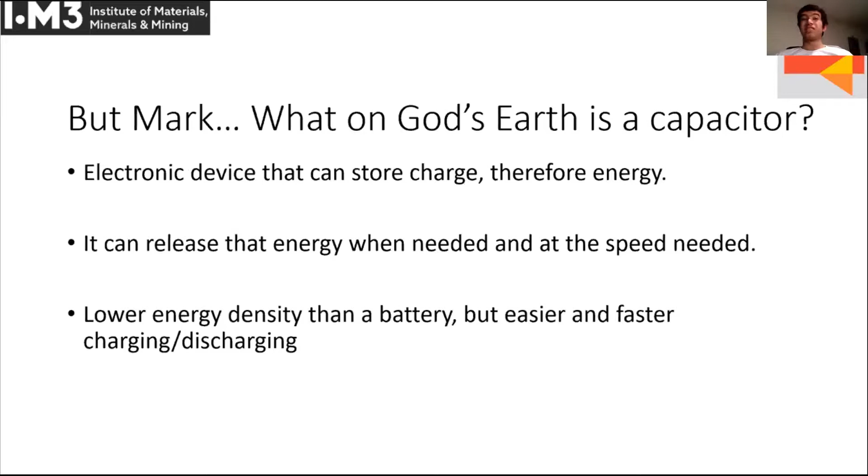What is a capacitor? So in its simplest form, it's an electronic device that can store energy in the form of charge. And it can then go on to release that energy when you need it and at the speed you need it, quite rapidly as well. It's much faster than a battery, but it can carry less energy than a similar sized battery can. So if you're into cars, you can think of capacitors as having higher acceleration and batteries as having a higher top speed, essentially.

So how does it work? Well, 2 metal plates are electrically connected and they're separated by air. So there's a power source that kind of pushes electrons from one of the plates to the other. And that means there's a pileup of electrons on one plate, which means there's a negative plate, and that leaves positive charges on the other plate. And the electrons would ideally like to combine with the positive plate, but because there's air in between, which we know is an insulator, they can't really make that jump. And so an electrical field is created in between them.

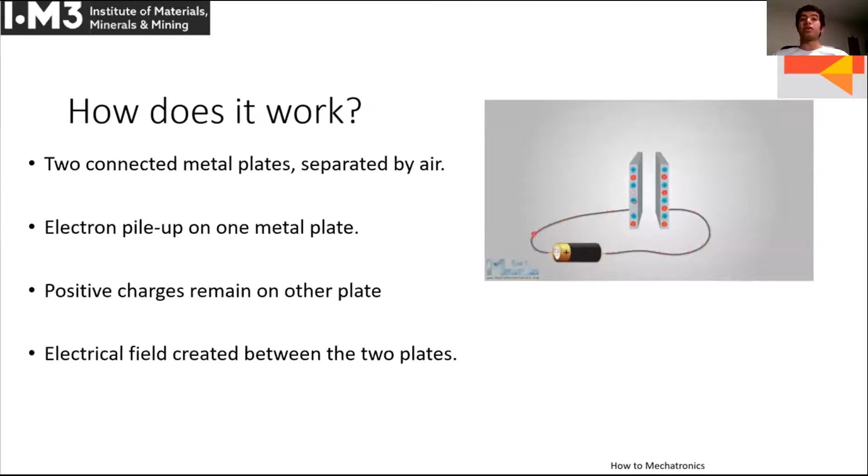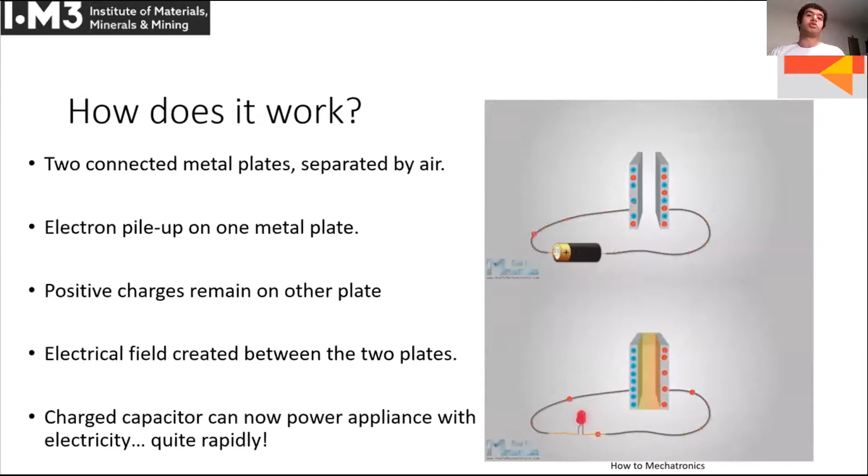And if we then remove the battery and put an appliance in, we've now just given the electrons a way to recombine with those positive charges. And in doing so, they pass by the appliance and operate it, essentially, which is useful for us. So capacitors are used in a lot of everyday things.

So this is just an epilepsy warning here. So if you're susceptible, I'll give you 3 seconds to just turn away, and I'll let you know when you can turn back. So 3, 2, 1. There's a flash camera snapping. So the time it takes between you hitting the button and the light to come out is the capacitor charging up. And then that fast release of light is essentially the capacitor, the electrons just coming back.

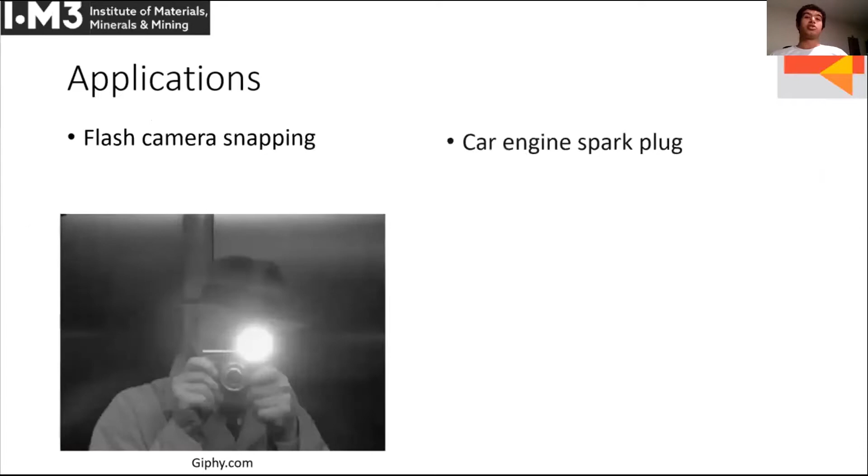But we don't live in a perfect world, so a high concentration of electrons, they're attracted to the positive plate. They would really like to go to that positive plate because we know positive and negative charges attract. And besides the attraction to the other plate, they also start to repel themselves on the negative plate. So essentially it's the attraction to the other plate as well as the negative repulsion in their own plate that leads to what we call breakdown.

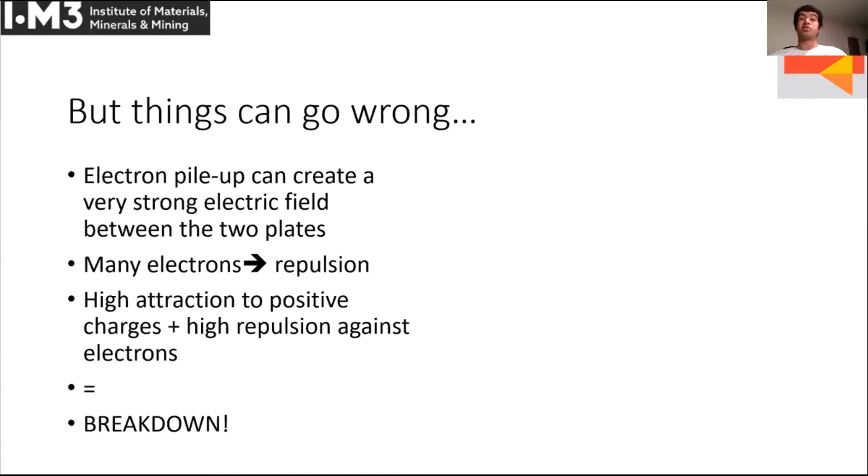So at some point you'd find that once the electrons get too close to each other, they really want to stay away from each other. They break down the air, so they will conduct through the air. It's called a breakdown field, and it's strong enough to turn the air from an insulator into a conductor. And that's what happens with lightning.

So there's an accumulation of electrical charges in the clouds, and it's so negative that they really want to get away from each other. And so the Earth is treated as a positive, and then the electrons just have to go somewhere, so it just strikes through the air. Fun fact about lightning, it superheats the air around it to 30,000 degrees Celsius.

So that's around 5 times the surface temperature of the sun. So there's a lot of energy in these electrons. So that's why they'd really like to get away from each other.

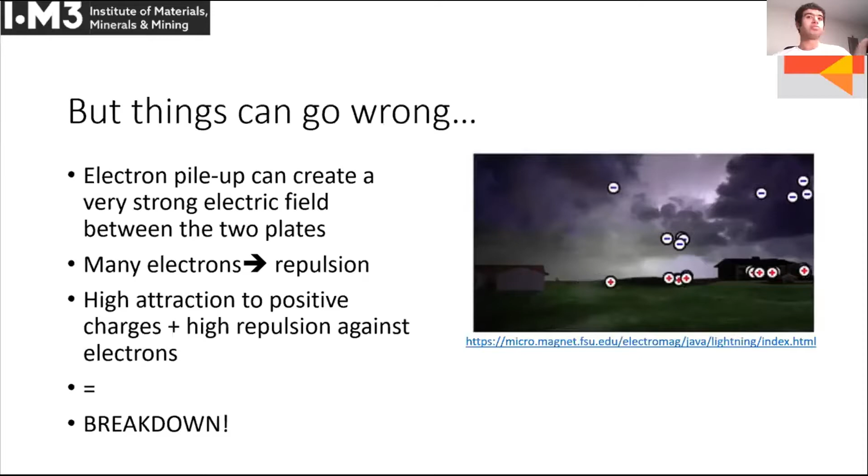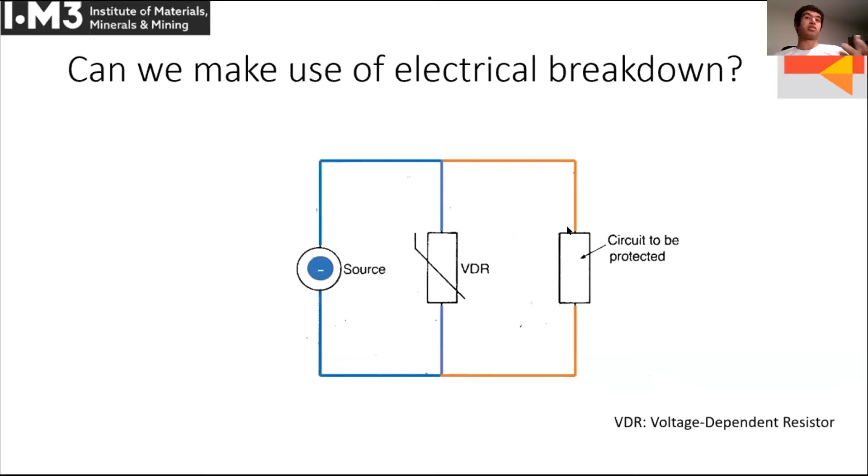This breaks down at high voltage. So essentially the electrons have a path of less resistance to go through. And by doing so, the high voltage is eliminated from passing through your appliance, essentially. So it's useful here, but it's not really useful for capacitors in this application. So still quite a big problem we need to solve.

So scientists have found through history: get something that can insulate better than air can. And that's pretty logical. If air can't hold that amount of electrical charge, get something that can. And a polar material also enhances the response to the field. So polar just means there's a positive end and a negative end of the material. So that's our challenge, finding an electrically insulating material that has a more positive end and a more negative end.

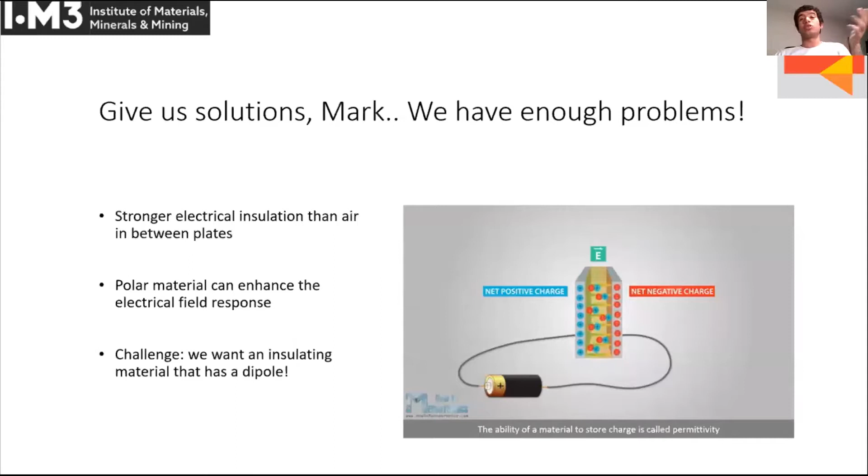And in order to quantify how good materials are and compare them to each other, there's a permittivity term that scientists often use. So the higher permittivity of a material, the more charge it can store in these kind of capacitor applications. So let's talk about the ceramic that they've come up with. So the most common one is barium titanate. We do quite a lot of this in our undergraduate program. So dielectric just means it's the insulating material that's used.

Barium titanate adopts what we call the perovskite crystal structure, which is shown on the right here. Each of the spheres represents an atom. So this is very small. A unit cell, which is what we call this, you stack a lot of these next to each other, and these make up your bulk material, essentially. So in barium titanate, barium occupies your corner atoms, titanium occupies the middle of the cube in the center, and the oxygen occupies the 6 center faces of the cube.

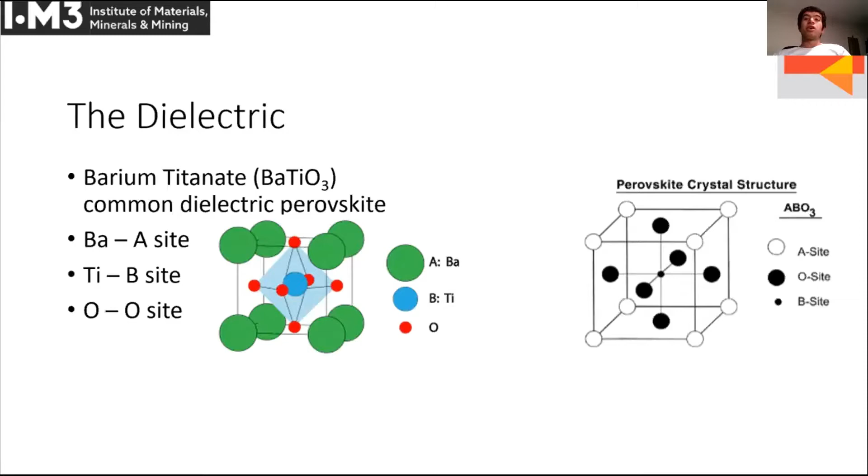Now that you know about the ceramic, let's talk about the capacitor itself. So scientists, again, have found out throughout the story of their development that instead of just having 2 plates, why not just stack a lot of plates next to each other? And that's what we can see here.

So the thinner, whiter lines are essentially the electrodes or the plates, usually made out of nickel, but can be made out of other stuff as well. And they're alternating at their termination, and that's how they get their positive and negative charges. And the darker, thicker sections are the ceramic in between.

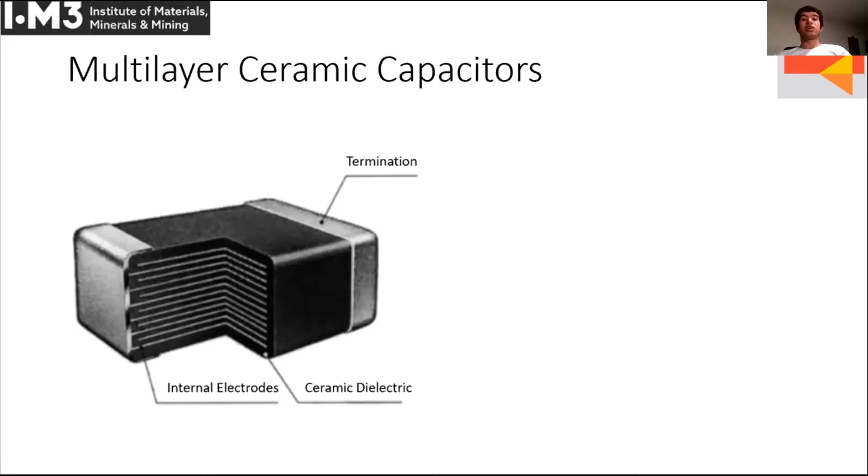So there's an extremely high demand for capacitors, and the industry's growth is exceptional. Just for scale, 2 trillion capacitors in 2015, and in 2020, we expected 3 trillion capacitors to be sold. And indeed, despite the pandemic, because we don't really stop using electronic devices, 3 trillion capacitors were sold. So that's 150% growth. Just to put it in scale, 3 trillion is 3 with 12 zeros behind it, just to give you an idea of the magnitude.

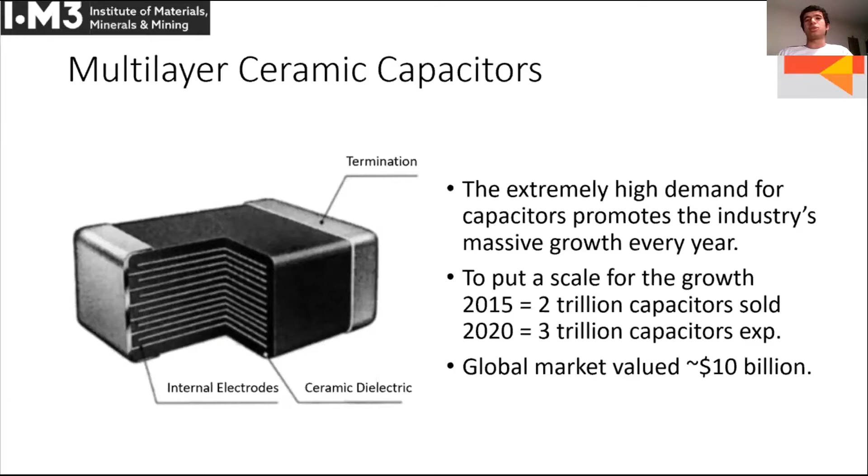Global market is valued at above 10 billion. So very, very big. There's thousands of these in your phone, thousands in your laptop. What you're using to watch this presentation probably has over 1,000 as well.

So in the previous slide, I showed you barium titanate was cubic. That's only true above 125. So there's more problems. I keep solving problems, but we face some more. Under 125, it's tetragonal, which just means that one of the axes is longer than the other 2. In this case, it's the vertical.

So because the axis is elongated, the titanium atom in the middle can offset when it's put under a field, so it has a positive charge. And so once we start putting it between the positive and the negative plate, that titanium atom really wants to attract to the negative plate. And that's what I've got on the bottom left image here.

So imagine each of these is a unit cell, and as the titanium shifts up, you get a slightly positively charged side and a negative charge, and that aligns within the 2 plates as shown.

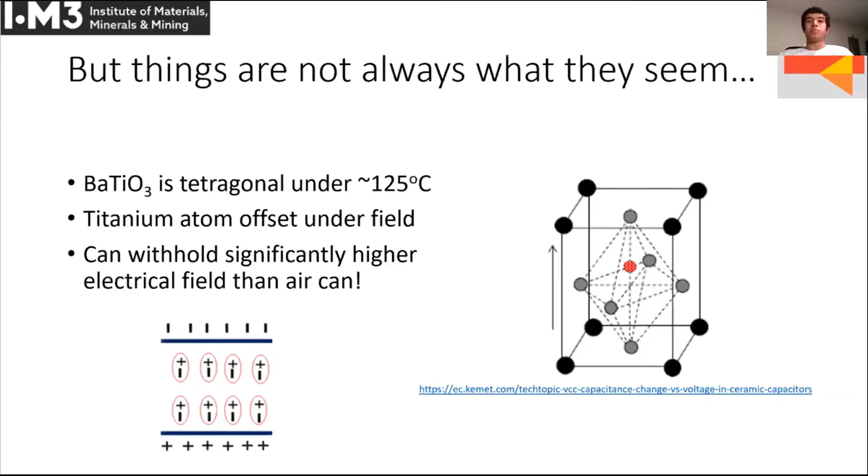Moving on, so I said it turns cubic at what we call the Curie temperature. So the titanium atom can no longer offset, it is just stuck in the center, and that way the permittivity, or the charge storing capability, takes a sharp hit, which is not ideal.

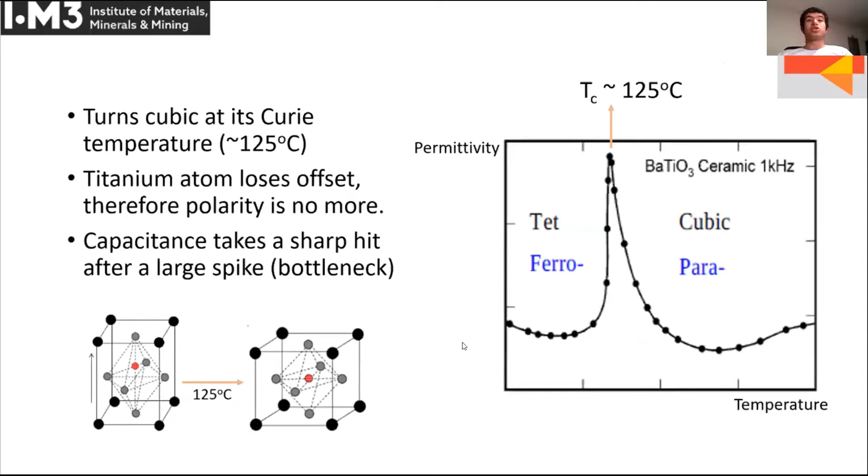So what we'd like to do then, I'll just present you with some small results of a research project I did as part of the SURE scheme at university. Essentially, we want to control that Curie temperature to be able to push it up or down, and then understand more about how capacitors can operate at higher temperature. We'd ideally like consistent behavior without the peak you've seen.

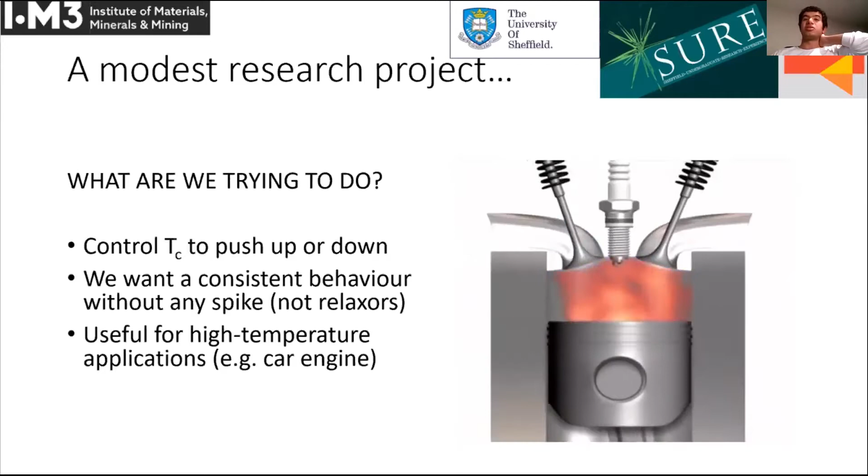And this is useful for understanding how capacitors can perform at high temperatures, potentially for high temperature applications, like the car engine. I should mention that the spark plug does not use ceramic capacitors, it uses other types of capacitors. But I just thought to keep consistent with regards to applications. But in terms of pure ceramic capacitor applications, any electronic device in any industry will have these in the thousands. So these are just some examples on the left here.

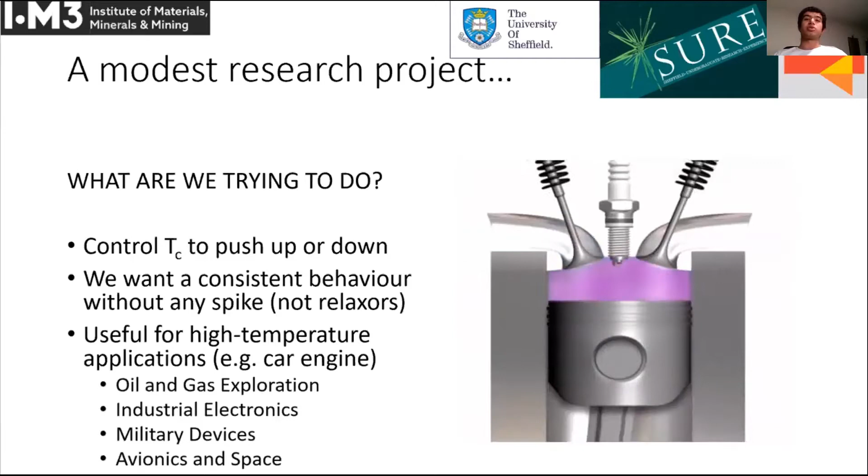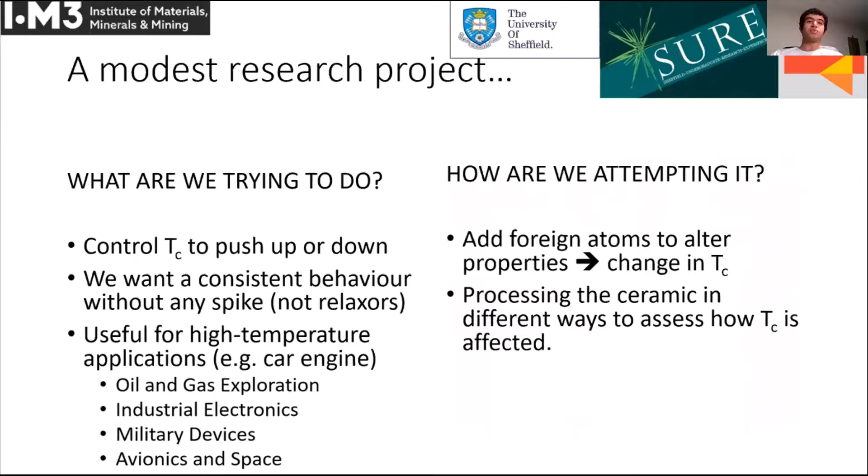So how are we trying to control that Curie temperature? Well, we're adding foreign atoms into that barium titanate ceramic to try and see whether we can get a change in that Curie temperature, to see if we can push it up or down. And making the ceramic in different routes or different ways can also help us assess if the Curie temperature is affected. So now that we have a good background with the topic, the foreign atom that we've chosen was calcium.

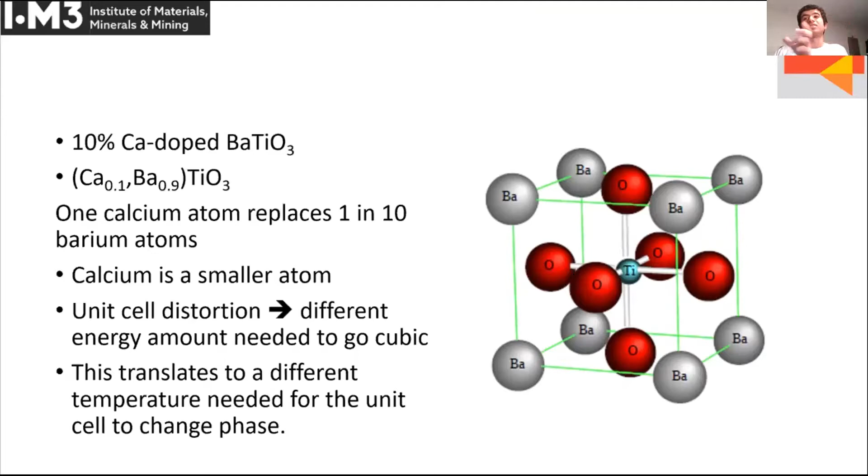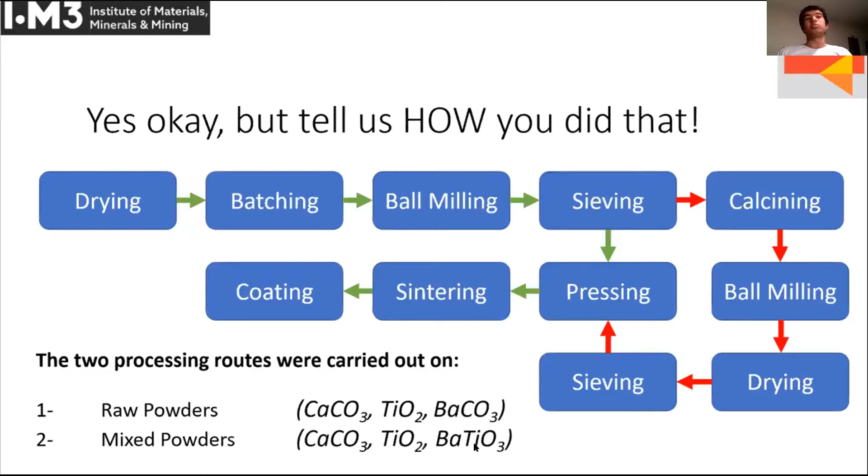So we undertook both those routes for two mixtures of powders: raw powders, which is how we obtain them in nature, calcium carbonate, titanium oxide, barium carbonate; and mixed powders, essentially just adding calcium and titanium to preformed barium titanate. So we did XRD experiments, and the scans essentially show that they're equivalent.

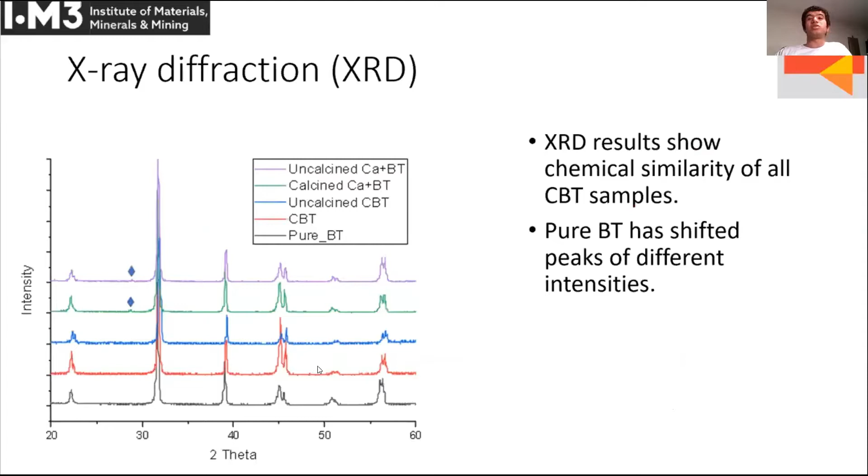Pure barium titanate, obviously you expect to have different peaks, so there's some shift if you can see it, and beyond 60 there's other shifts as well. But what I really want to show with this slide is that they're essentially equivalent, and we are in theory testing the same material. With XRD as well, you can characterize these distances of the unit cell.

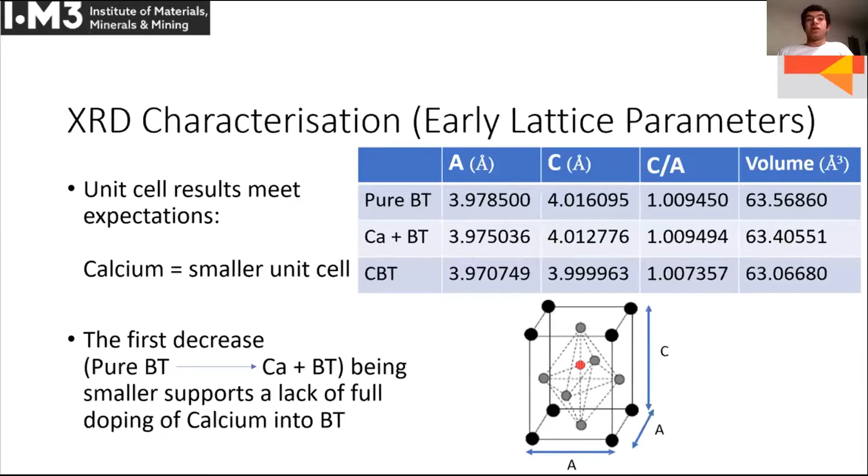So how we then measure the electrical response is we put the ceramic in an oven and heat that oven at a rate of 1 degree per minute. And then we set up alternating currents, which just go from one direction to the next. They keep kind of reversing direction. And these scan through the ceramic pellet 500 times at different speeds.

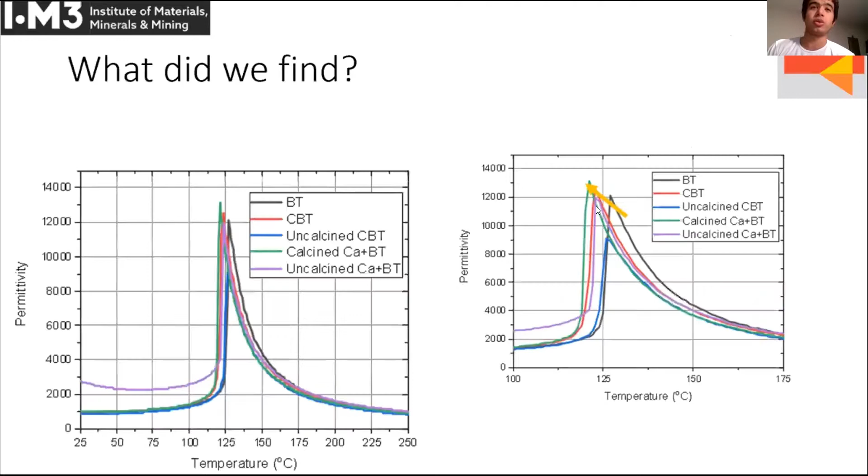And so in doing so, the cubic transition can be delayed or happen early, depending on what we want. So it's through introducing foreign atoms and making them in different ways that we can really utilize different transition temperature relationships. And we are, as a result, more able to use capacitors in different temperature ranges. Thank you so much.

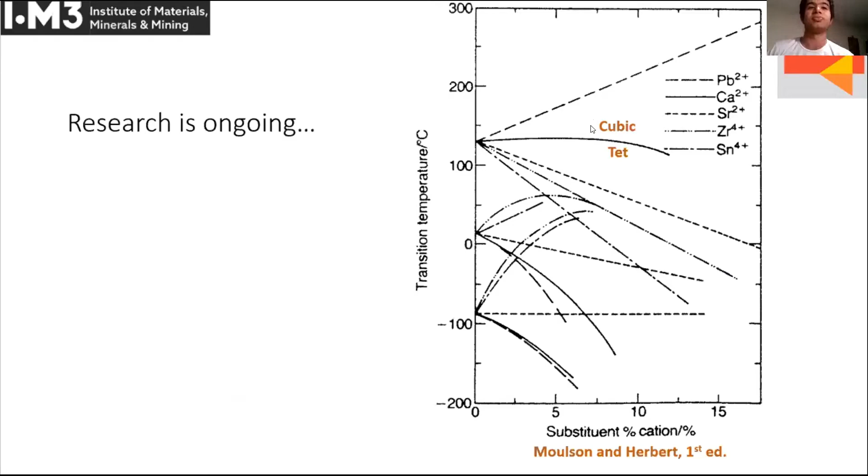Brilliant. Thank you very much, Mark. Very interesting presentation, and I'm sure the judges will have some questions for you. Okay, perhaps I will go to Peter first.

Okay, yeah, very interesting. Capacitors are things we don't often think about, do we? You know, we look at a spark plug and you don't think there's a capacitor there, and all these other things. So there's lots of them around. There's millions of them. So quite fascinating, the hidden component that we didn't know about.

A more general question, rather than going deep into the technical stuff: what about the availability of materials? There are so many capacitors required around the world. You're talking about barium titanate, wasn't it? Yeah, well, the calcium doped version. I presume that's pretty available, is it? Is the manufacturing of this pretty easy? And does that therefore make quite a cheap capacitor?

Right, thanks for your question, Peter. Well, actually, it's quite a developed process, you're right. Usually the main way of manufacturing these is called tape casting. In terms of the material supply, for barium titanate in itself, there's no shortage in the materials that I'm aware of. However, the industrial ones that we use do use rare earth elements.

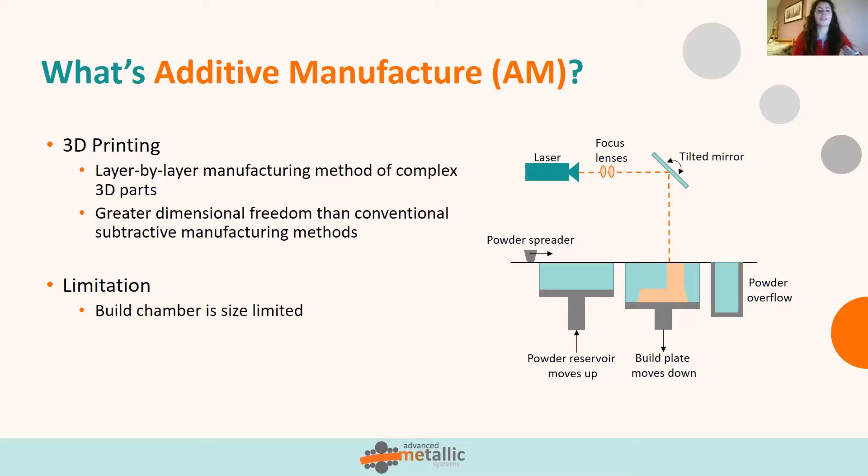So now I'll move on to introduce brazing. So brazing is a technique that's been around for thousands of years, and it involves the joining of two materials together using a filler metal at temperatures that are typically above 450 degrees C. So brazing has found a variety of applications, including fusion energy and microelectronics. And a particular advantage of brazing is that it can be used on dissimilar materials.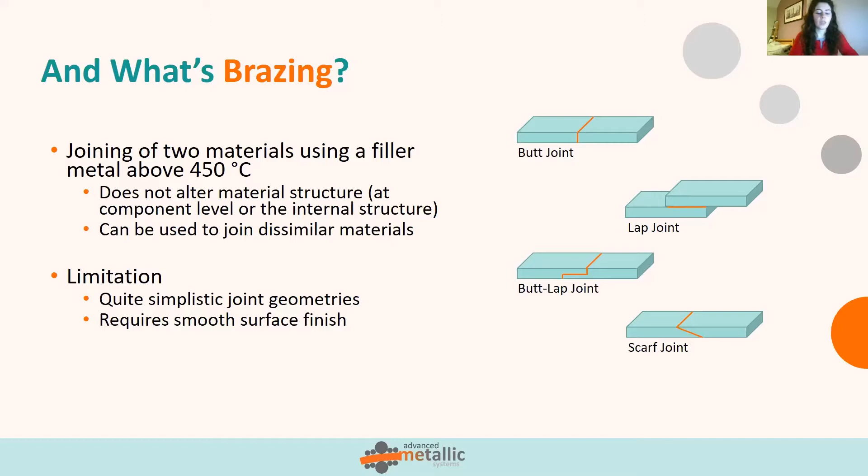So brazed joints are typically stronger and have better mechanical performance than soldered joints, and brazed joints also have an advantage over welding, because welding typically can cause thermal distortions within the microstructure. However, brazed joints can be limited in terms of the simplicity of the joints that you can produce, as you can see on the right-hand side of my slide. And also the surface finish for a brazed joint to be effective is really quite smooth, so you really need to machine it down.

In terms of the stages of brazing, it's a 6-stage process. First, you need to ensure that you've got a good joint design. You need to make sure that the base materials are cleaned for anything like oil or grease that might have been put on them during the manufacturing of the base materials. Then the oxides are removed with a flux. You then heat the base materials up to the required temperature for the brazing, and then typically introduce the filler metal, and this spreads through the joint via capillary action. And then the entire assembly is cooled and cleaned for any excess flux and such like.

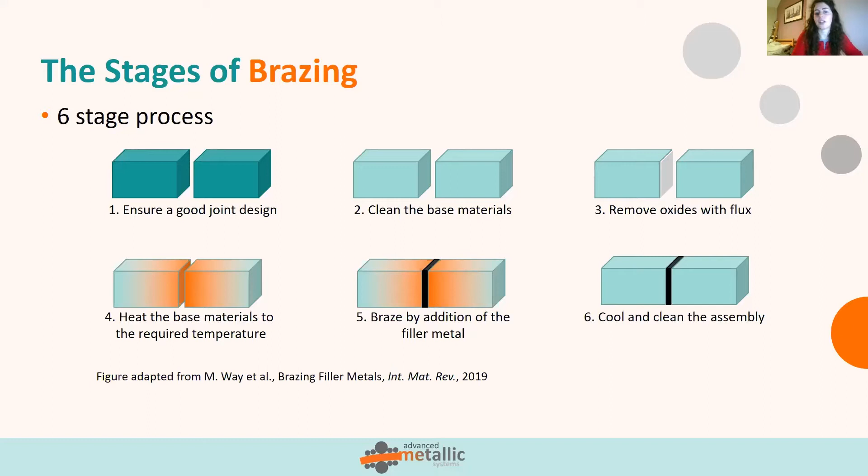So a really important part of this is choosing the correct filler metal system for whatever application that you're needing it for. So the first core property that I'm going to tell you about is the melting range. It begins at the solidus temperature, which is represented by T3 and T4 in the image. And that's when the alloy will begin to melt, and it goes all the way through to the liquidus temperature, which are represented by T1 and T2. And that's where the alloy will become fully liquid.

So this is really important for the specific application that you'll be needing a brazed alloy for, because you really don't want the filler to be melting in applications. And you can also see that T1 and T3 has a much wider melting range than the melting range between T4 and T2.

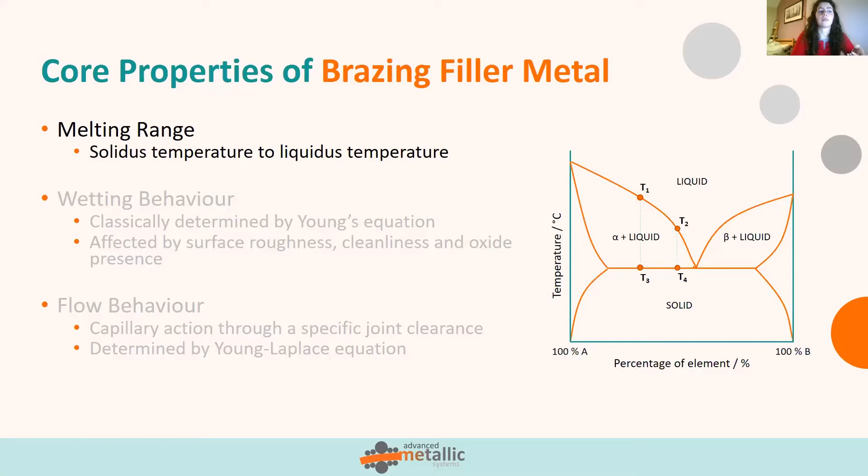The next of these core properties is the wetting behavior, and this is classically determined by Young's equation, where an angle less than 90 degrees is wetting, and this is what we want, and an angle greater than 90 degrees is non-wetting. So you need to have a positive interaction between the material and the filler metal to ensure wetting, and therefore to ensure that a joint is formed.

And you can have different types of wetting. So you can have reactive wetting or non-reactive wetting. And it's really important to consider what type of wetting you're going to be looking for, because reactive wetting itself can give an interaction zone which could cause undesirable effects, such as brittle intermetallics that would reduce the joint strength.

Other factors that affect the wetting behavior are also things like surface roughness, cleanliness, and oxide presence. And the last of the core properties is the flow behavior. Filler metals move through a joint through capillary action, so the flow behavior is really important, and this is influenced by the melting range. It also means that you can tailor a joint clearance based on the flow properties, or you can base which alloy you select on the clearance that you need. So a better flowing alloy would be better suited to a smaller clearance gap.

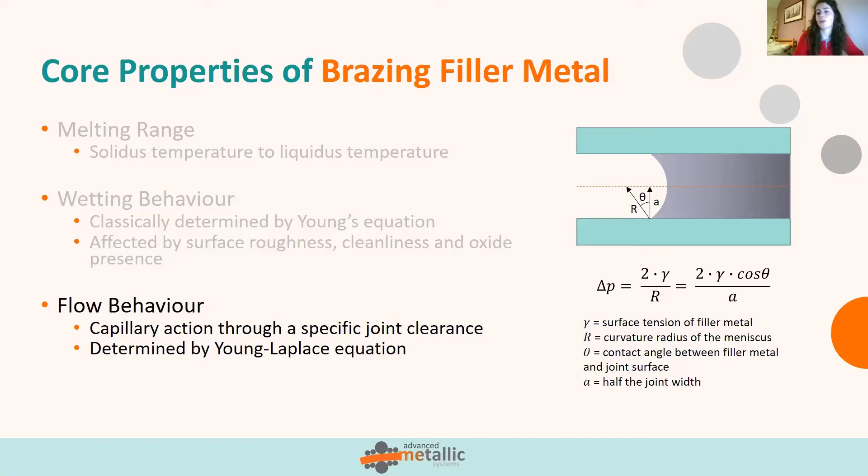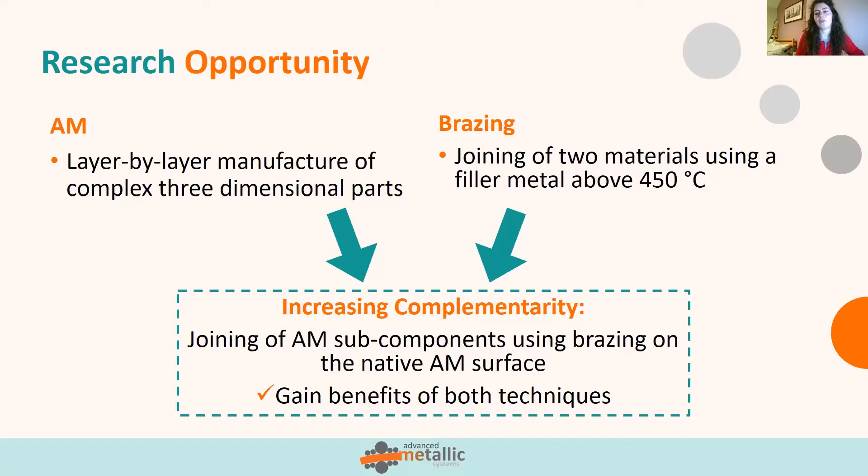So I've introduced additive manufacturing as a layer-by-layer manufacturing technique, as well as brazing, which is the joining of materials at high temperatures using a filler metal. These are really important areas of research in their own right. However, what I'm really looking to do is increase their complementarity so that they can be used together. So I'm looking to join additive manufactured subcomponents, which might be limited by the size of the AM build plate, as I showed earlier, and do that by brazing on a native additively manufactured surface, and then you get the benefits of both techniques.

So why could this be important? This could reduce the lead time of component manufacture compared to a multi-step subtractive manufacturing technique. It also reduces the wastage that is there currently, because at the moment any AM surface is machined down to create that smoother surface, so it would stop that from happening. And also, as I mentioned earlier, the AM powder feedstock can be reused. Other benefits also include the creation of more complex joint geometries by drawing braze alloys in a certain way potentially, or improving the joint strength and reducing the effects of mismatched material properties. And these can both be done by utilizing additive manufacture and some sort of topography optimization.

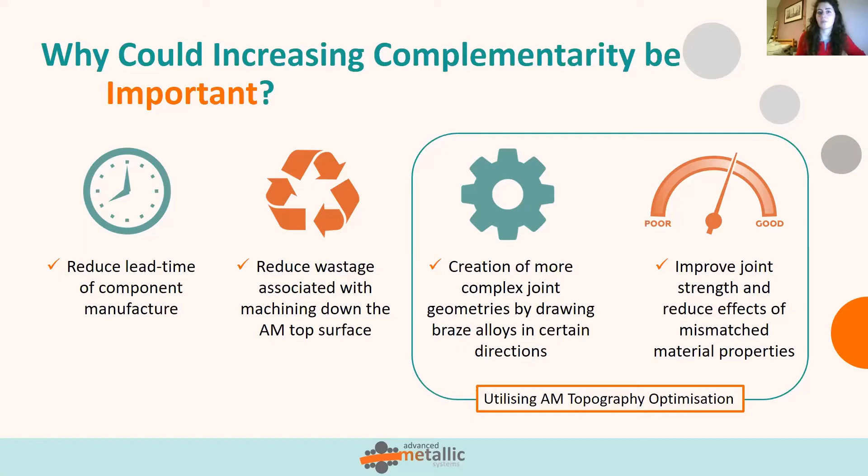So this sounds really cool. So why isn't it happening yet? The typical surface finish of an AM part, according to its arithmetic average roughness, which is the Ra value, is between 5 and 35 micrometers, whereas the required surface finish for brazing is between 0.6 and 1.6. So there's quite a vast difference between these two values.

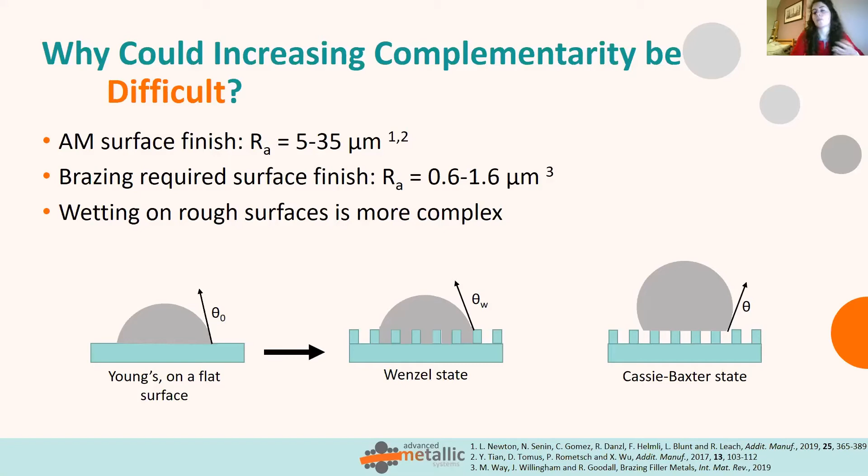And it also turns out that wetting on rough surfaces is much more complex than the traditional Young's wetting that I explained earlier. It ends up being either the Wenzel state, where it fills the grooves on the surface, and this would be wetting, or the Cassie-Baxter state, where there are small air pockets trapped between the alloy and the surface, and this is typically associated with non-wetting states. A lot of the literature focuses on inducing this Cassie-Baxter state for hydrophobicity applications, such as self-cleaning windows and water repellent surfaces, but we need the opposite for brazing.

And a lot of the wetting research occurs in either a very randomly rough structure or the complete opposite, a very structured surface. On the one hand, you've got randomly rough surfaces that are on a scale that would still be optimal for brazing, and literature here does focus on metal alloy contact and also spreading behaviors. Whereas additive manufactured surfaces are much rougher than the randomly rough structures covered in literature, but not as structured as the structured surfaces that I've shown. The structured surfaces themselves can control liquid movement even beyond the wetting stage into the spreading stage, but they're still controlled by capillary action. However, the vast majority of this research focuses on the movement of water.

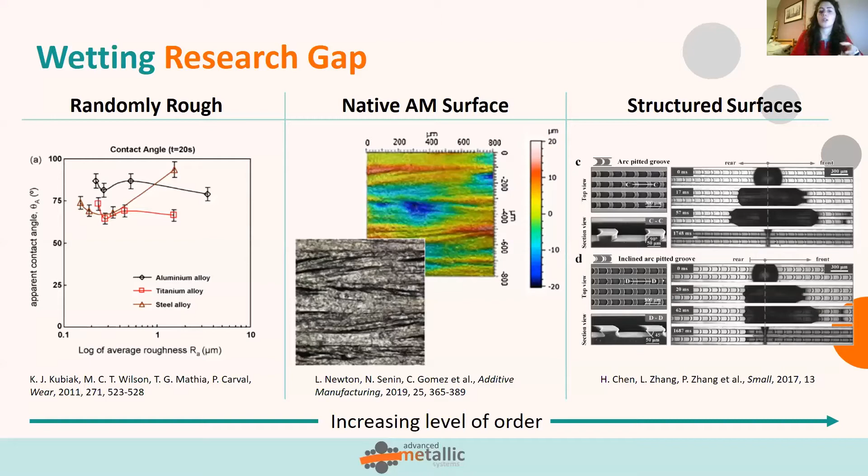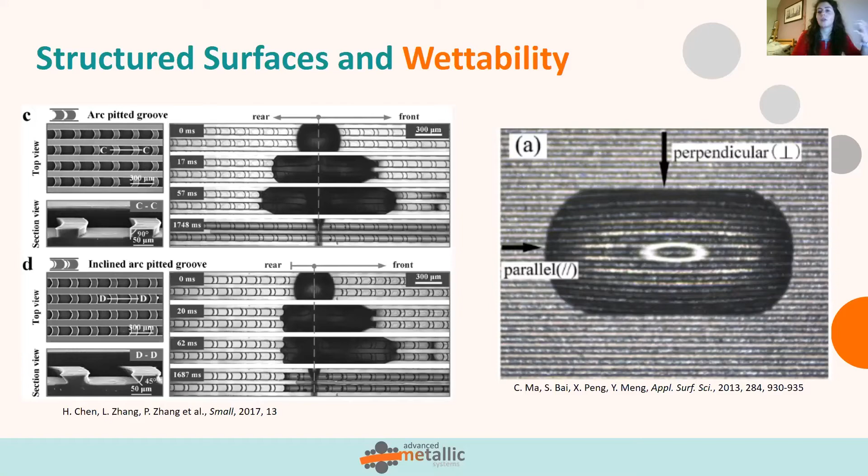So this is just a larger version of the image that was on the previous slide. Between the top and bottom results, the only change is from the straight groove to an angled groove at 45 degrees. The very bottom right of the first image shows the extreme preference for moving the water in a forward direction, and it pins the backward direction because it's controlled by capillary action. So theoretically, this could be applicable to braze alloy systems as well. And you can even see in a much more simplistic system, which looks at the spreading of liquid over straight channels, that there's a preference for movement in the parallel direction compared to the perpendicular direction.

So how could this be applicable to brazing and additive manufacturing? What I'm doing is hoping to study the high temperature wetting on native additively manufactured surfaces in situ.

So I'll be analysing it via tomography to look for any potential voids within the wetting system and any potential problem features or aspect ratios that might be too severe for an alloy to move over. And also looking towards the mechanical testing side of things, looking at shear testing for joint strengths.

And also, because this research shows that patterns could enhance wettability and even control flow direction, I'm hoping to use the freeform nature of additive manufacturing as an advantage, rather than having the roughness of the surface be an issue, to hopefully induce wetting or potentially promote some sort of anisotropy in the wetting flow.

So the image on the left is an example of some of the structures that I've made. So these are very simple straight wave gratings. And hopefully I can get some results out of this. But as I say, I'm only in my first year, so I'm very much presenting a concept to you today.

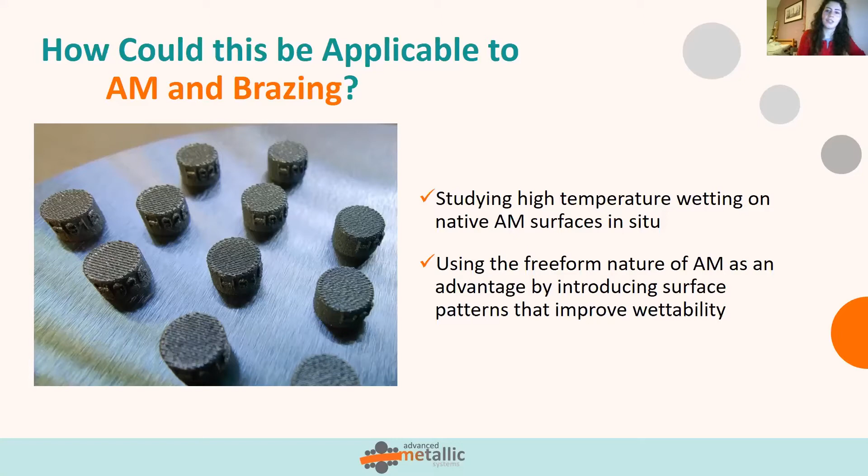So in conclusion, today I have introduced to you what additive manufacturing is. So it's a layer by layer building technique that can create complex geometries. And I've also introduced brazing as a joining technique that could be used using a molten filler metal. And really what I'm hoping to do with my research is combine additive manufacturing and brazing.

And this has the potential to reduce manufacturing lead times and reduce wastage. It also has the potential to create more complex joint geometries and potentially stronger joints with topography control. And there's a variety of industrial applications for this. And it really uses techniques that are already standardized in industry. So it could even be a further promotion on the two individual techniques.

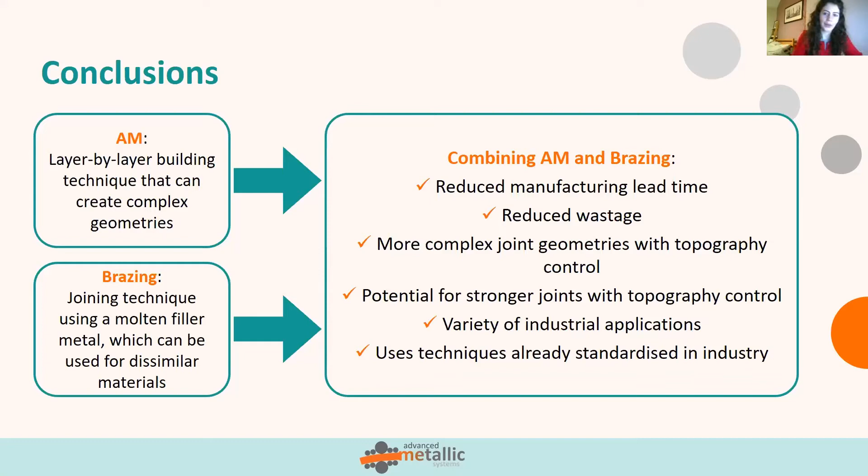Frances, thank you so much for an excellent presentation. I can see Mark clapping, and I've got no doubt others are clapping at home as well. Oh yeah, look, you can see them all coming through. People have found the clap function in the reactions button at the bottom. I'd forgotten that existed. Thank you, folks. Frances, I have questions, but I'm going to hold mine until the end, and I'm going to pass over to the judges. I can already see Peter's unmuted. I think I better let Sarah ask the first question. So I'll go last. Over to you, Sarah. Right. I'm going to get straight in there then.

I love the idea of using two different construction methods together. So you mentioned that you could use soldering and you could use welding, and they each had their own limitations. But could you give me an example of an application or an environment where you could specifically use a brazed construct, if you like, where soldering or welding would actually be unsuitable?

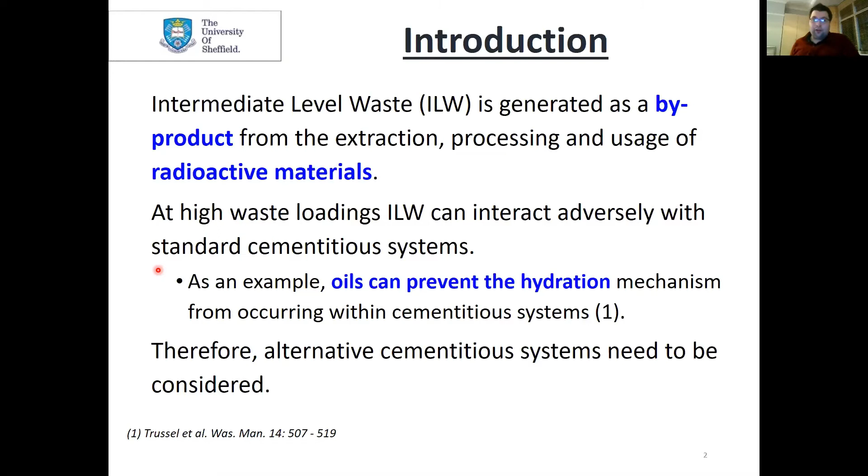It coats the cement particles and prevents the water from interacting with the cement by forming a hydrophobic layer. And that hydrophobic layer then stops that water getting in and you get a very minimal reaction. So we need to look at alternative cementitious systems.

Well, these are completely different, and they go by a completely different mechanism. So you react an aluminosilicate precursor with a high alkaline soluble silicate solution, and when you react them together, you completely dissolve the metakaolin away, and then you form a new gel network. And by that, you can tailor it to the exact properties you want to gain from that material.

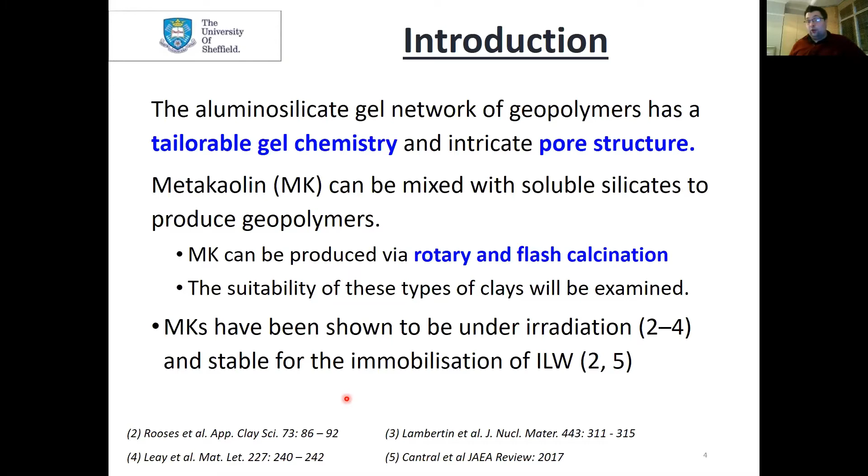And there's always arguments in the literature about dose rate to total dose effects. So we picked a sort of middle of the road dose rate to get a relatively high dose of 3 megagray. This isn't a lifetime dose of the samples, but it is close and it is fairly representative. And it's also 3 times whatever anyone else has published in the literature. So this is really interesting.

It was interesting. So as we go into this, I decided to have a look at the water loss. As I mentioned, you get hydrogen release. This is from the radiolysis of water. The cement is majority made up of a large amount of water, so we want to see the effects of irradiation on this water. So we've done TG analysis with mass spec, and the results are fairly interesting.

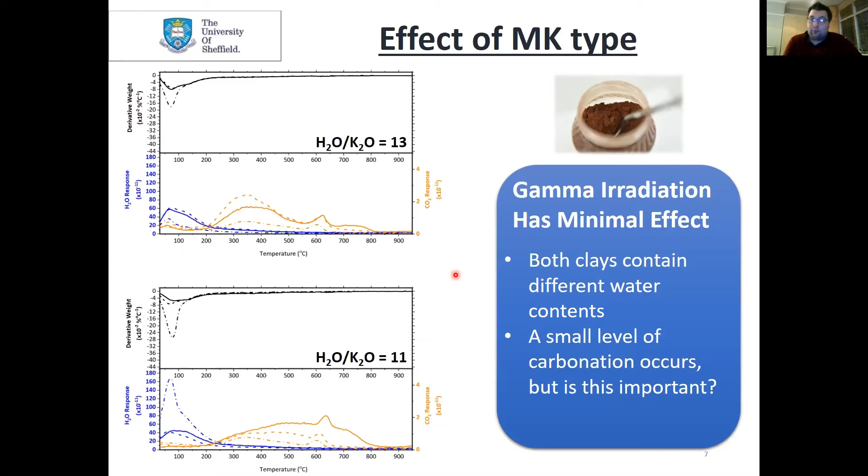Now, irradiation has been shown to produce crystal structures in cement systems, but it doesn't appear to show anything in geopolymer and alkali activated materials. So this is incredibly interesting and shows that there is mineralogical stability. Now, if we flick over to the flash calcined Argicem system, as it is known, this red metakaolin is incredibly crystalline in itself, and it has large amounts of quartz in that sample. You can see there's mineralogy there, but there isn't any change in it.

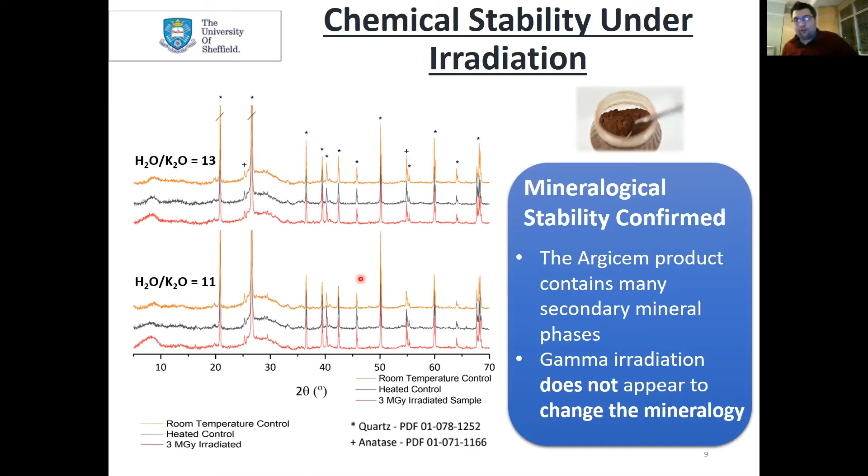So let's go down to an even smaller scale. Let's start looking at the nanoscale. I've done this by magic angle spinning NMR for the aluminium-27 nucleus. The aluminium-27 nucleus is a key part of the gel structure within a geopolymer system. And also these samples take around an hour to run each.

Silicon is another major component, but if we run that, that's a 6-hour scan. And to be honest, it costs a lot of money to run the machine for that long. And also, it doesn't show us much more data. It shows us different data, but chemical stability should be shown from the aluminium data.

So it does show that the machine is capable of seeing small changes in the crystal structure of the material, but it hasn't seen any based on the irradiation compared to the heating of these samples. So I think it's fair to say that these samples are fairly stable under irradiation. They lose a bit of water, but their structure and their overall chemistry remains the same.

So let's go and have a look at the actual sample itself, the solid samples, and do some imaging on them. Now, this work was done at Imperial College, and you can see that fluorescent epoxy and they've impregnated it into the sample. So you've got room temperature, heated and irradiated sample here at the bottom. And the Argicem material fundamentally has more epoxy impregnated into the sample.

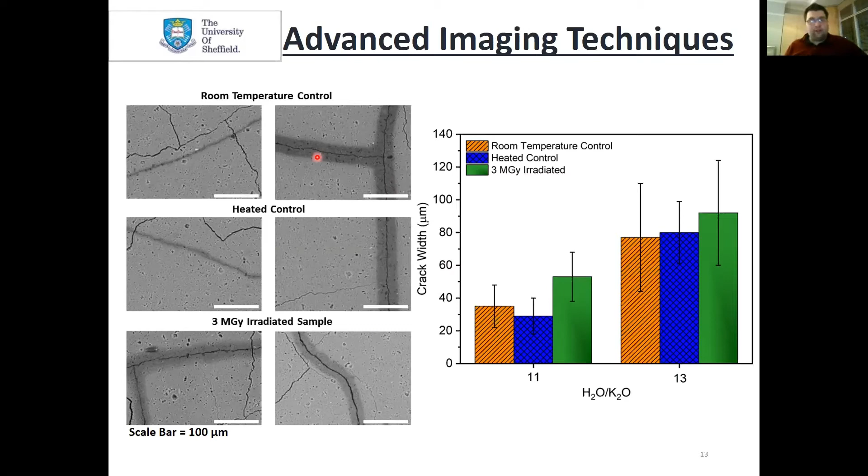And the reason for impregnating the epoxy pre-sample analysis is that you don't get cracks like this, which are formed by the vacuum of the SEM, and they cloud your results, and you see things that aren't quite there. By just analysing these, these are cracks that have been formed either by the actual irradiation, or they could be produced by the cutting of the sample, but they've all been cut in the same way, so you would expect these to be relatively similar across all the samples.

So here we can see the heterogeneous structure that I mentioned earlier, and why it would be really difficult to look at this and analyse this pore structure. So what I would like to do is some micro CT analysis, which I've actually got booked in for next month, to really focus down on the pore structure and see if we can see changes in the actual porosity of these samples.

So just to conclude, I have shown that these samples are stable under gamma irradiation. Careful formulation does need to be undertaken in order to control the chemical and physical properties of these cements under the harsh conditions of gamma irradiation.

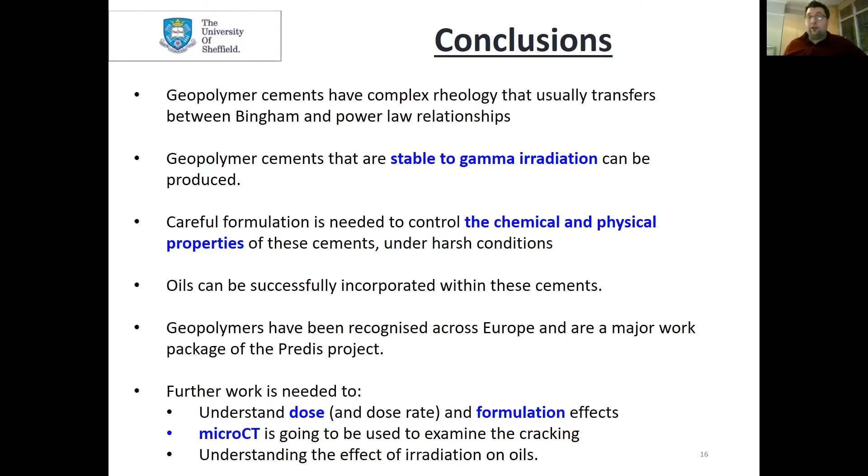And just a bit of future and further work that I want to do. I mentioned that we use dose rate and dose and things like that. Analysis of this a little bit more, widening the formulation, showing more tailored chemistry would be really useful for this. And as I mentioned, micro CT to examine the cracking and also the porosity would be really interesting. And really nailing down what's happening to these oils under irradiation is something that really needs to be done in order to prove that these materials are safe for nuclear waste disposal.